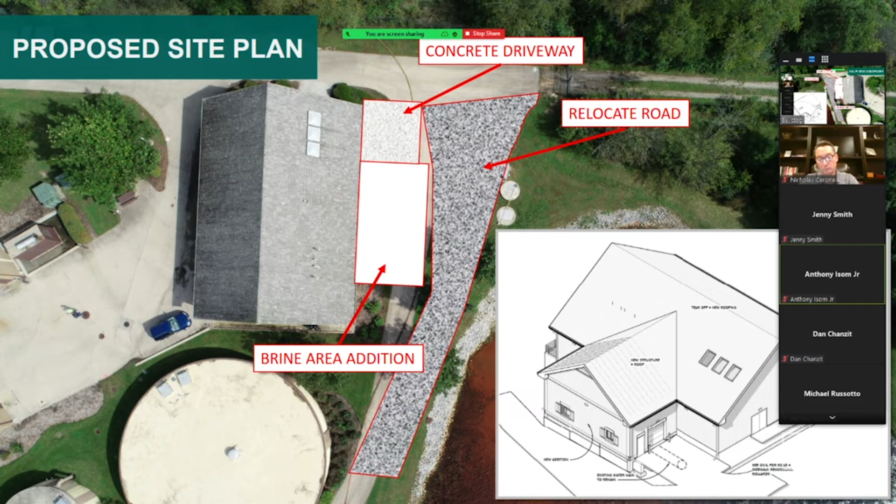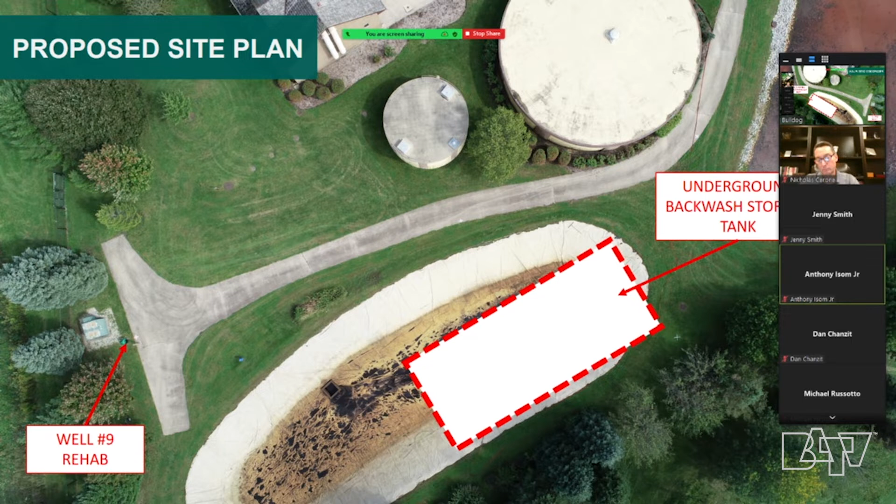So a brief reminder of the high-level items that are part of the water treatment plant expansion project or modifications project. There was a brine area addition occurring at water treatment plant number 2, to improve the process related to the chlorine feed system. You'll see some definite progress there, as well as the underground backwash storage tank that is replacing the existing backwash lagoon associated with water treatment plant number 1. If you look at this aerial, which is pre-construction, and the outline of where the backwash tank is to go, you'll see there's definitely been some advancement on that front as well.

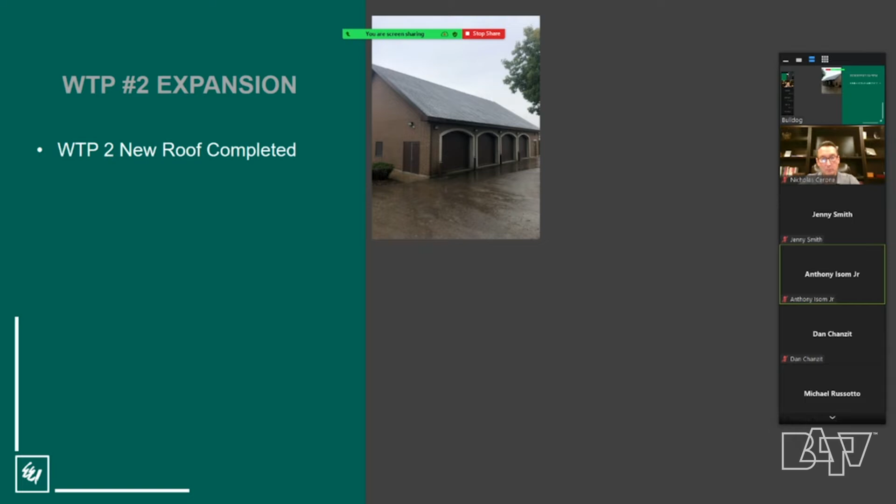So moving forward into what has happened since the last update, water treatment plant number 2 has received its new roof, so that building's roofing is done. Water treatment plant number 1 is also getting a new roof that has not been completed yet, I believe, right? Correct. See, this is why I bring Emily, so I can look over my shoulder and confirm when I'm running astray. The new brine building interior is moving along. They've done a lot of the coating systems. It's completely enclosed now from the elements, so they can continue to work through the winter here and get the internal items constructed and get the processes online. The anticipation is that this will be operational within the next 2 to 3 months.

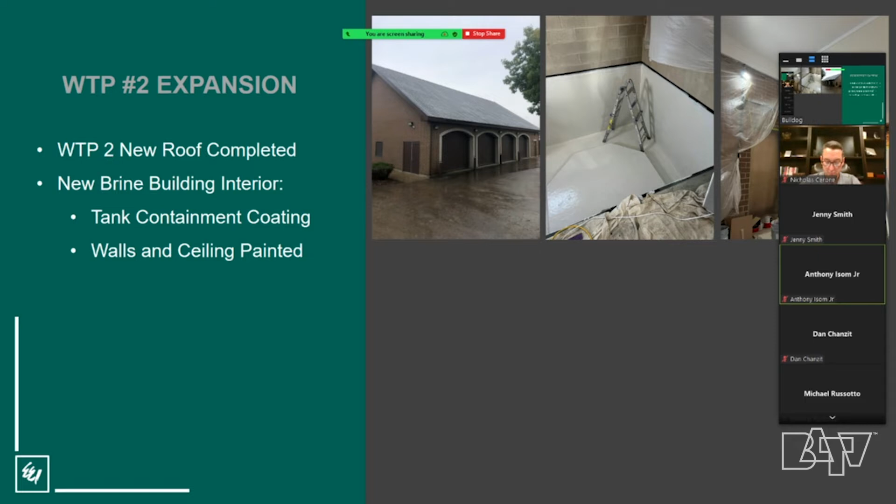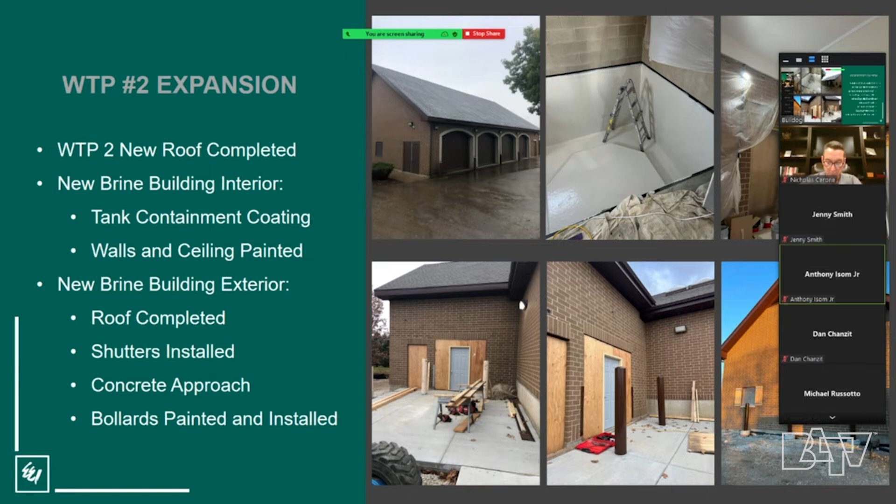The brine building exterior, you can see, is mostly complete, while they wait for the doors to come in and to be able to put those in place. They have temporary arrangements to keep the heat in while they're doing painting and other work inside that building.

The backwash storage tank has also seen quite a bit of work since our last update. With the last update, they had just poured the bottom slab. Well, they've also constructed the walls and the top slab, in addition to installing the hatches. In fact, this construction is essentially complete. There are some instrumentation items yet to be installed, but otherwise it is fully functional and has been functional for a handful of weeks now, and it seems to be operating very well.

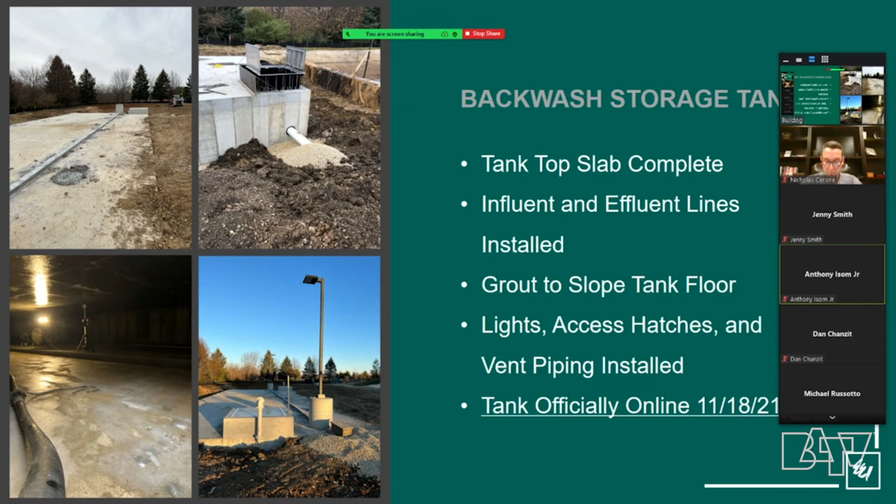Online November 18th, as noted there. Well 11 rehab is ongoing. The contractor has noted that the pumping assembly should be arriving hopefully within the next couple of weeks. Anticipated reinstallation of the equipment in January, with startup anticipated by the end of January. So they will then move on to the next well rehab, which is well number 10, and subsequently after that is completed, well number 9. So all 3 deep wells that go into water treatment plant number 1 are rehabbed as part of this project, as a reminder. This is still the first one under rehab.

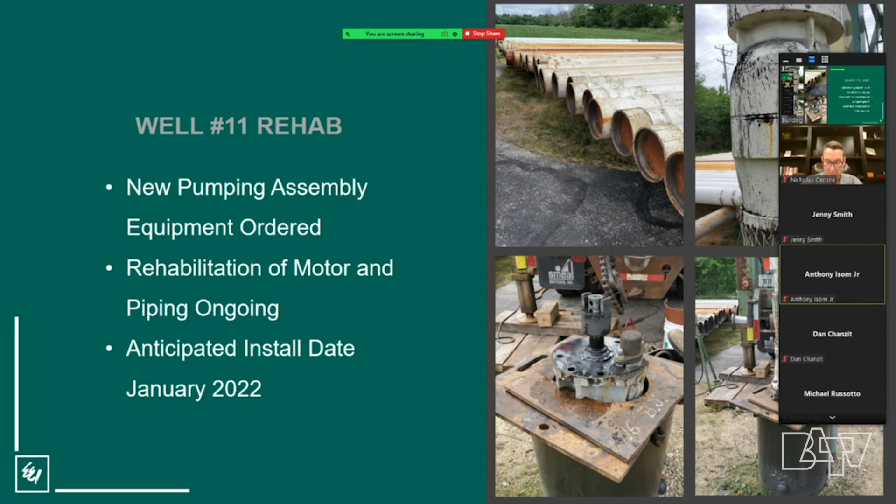Similarly, the high service pumps are still waiting for the equipment to arrive back on site, but that is expected within the next week. It's anticipated early in January at the latest that those first 2 pumps will be reinstalled, and then they will move on to the next set of pumps, and that will be duplicated one more time because there's a total of 6 pumps that are going to be rehabilitated as part of this project.

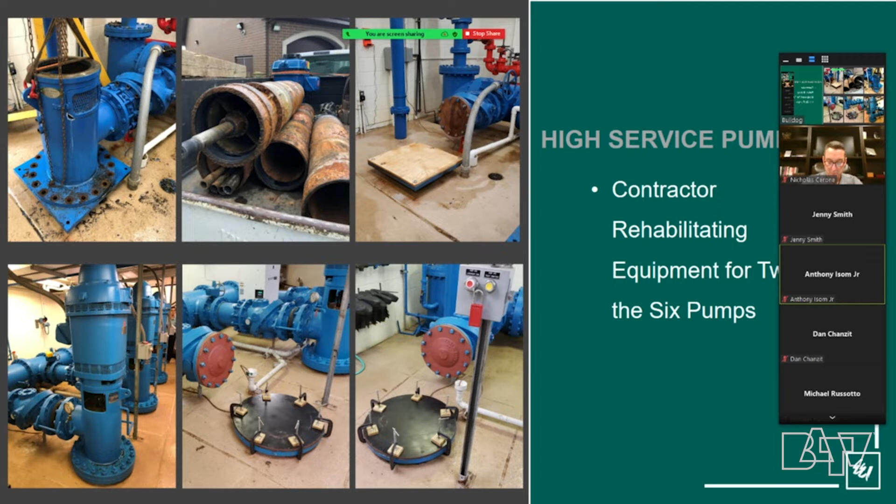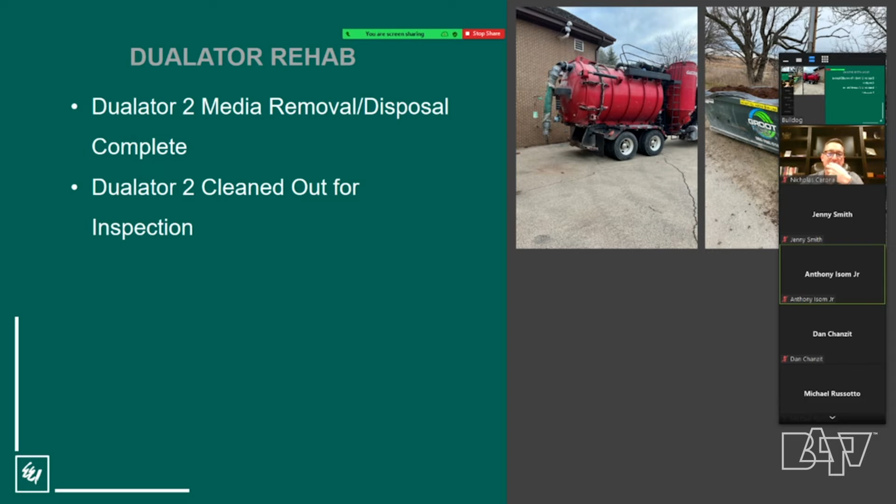So they have commenced with the removal and disposal of the media in one of the two dualators. They're keeping this facility online using the remaining dualator while they do the rehabilitation on this second one. That media has been removed from the dualator and it's been cleaned out for inspection. That inspection is ongoing, and we're currently determining the level of recoating that will have to occur within that dualator, which was expected as part of the bid process.

There's also been a very interesting component to this that city staff has really helped out with, and it's anticipated to provide great benefits as the project moves along. We are reusing some of the original filter media and reinstalling it along with new media, because there are properties with that existing media, accumulated over time, that will actually help remove ammonia in the raw water, which can otherwise interfere with the chlorination process. So the anticipation is that reseeding the new media with this existing media will help those properties proliferate within the new media and readily help remove the ammonia long term.

What does that mean? That means less chlorine has to be fed into the system, so it's lower chemical costs and a much more efficient process. So it's using the existing treatment process and reusing that, putting it back into the existing dualators when we put the new media in there.

The city staff has taken some of this media, they had existing tankage that we put it into, and they are watching over it and actually running water through it to give it the source it needs to continue the activation and treatment it can provide. So it's kind of an interesting side project that city staff has really helped facilitate moving forward, almost like a little science experiment. When this is all said and done, we're going to continue to monitor this and see how quickly we're able to regain the original treatment we expect. There's not much literature on this, so we're kind of blazing a new trail here, again with the help of city staff.

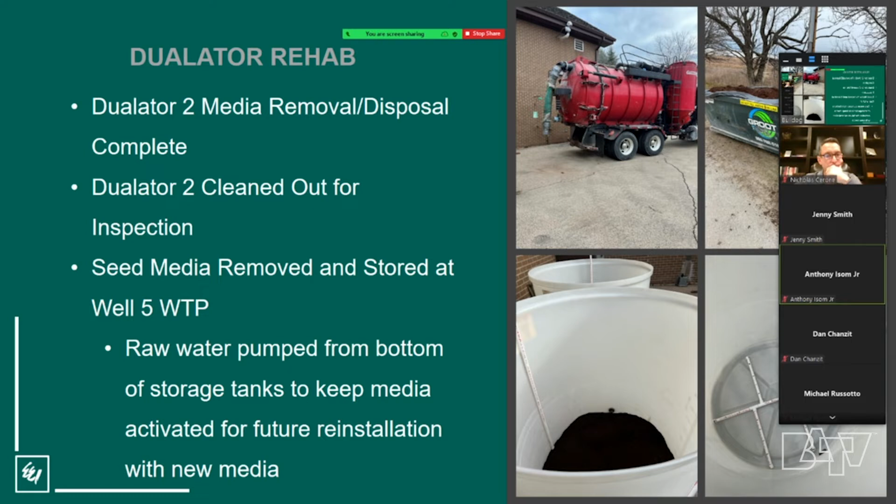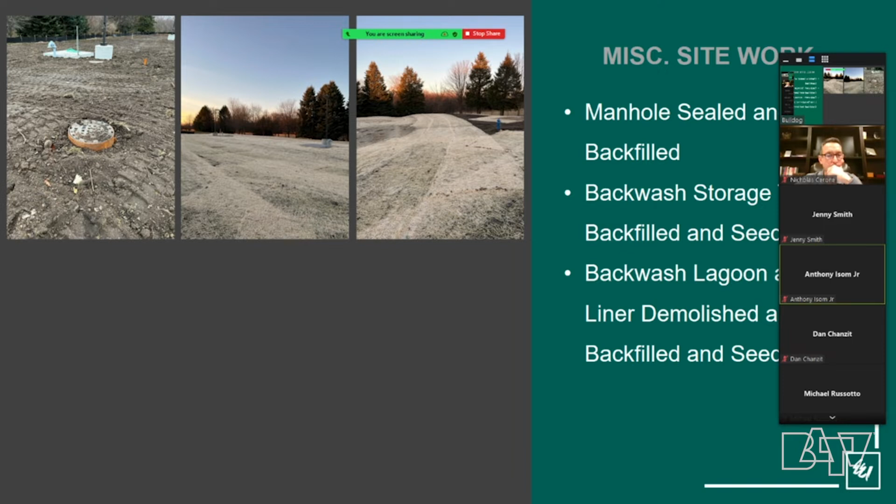Other miscellaneous site work: there's actually been quite a bit of restoration over the last couple of weeks. The contractors worked hard getting a lot of the rough and fine grading done in areas where they've completed work. They've laid down seeding and blankets to get through the winter here. It's anticipated additional restoration will occur when springtime comes, but the site where they have completed work is in pretty good shape at this point, including the new backwash tank, where they have done all of the grading and filled in.

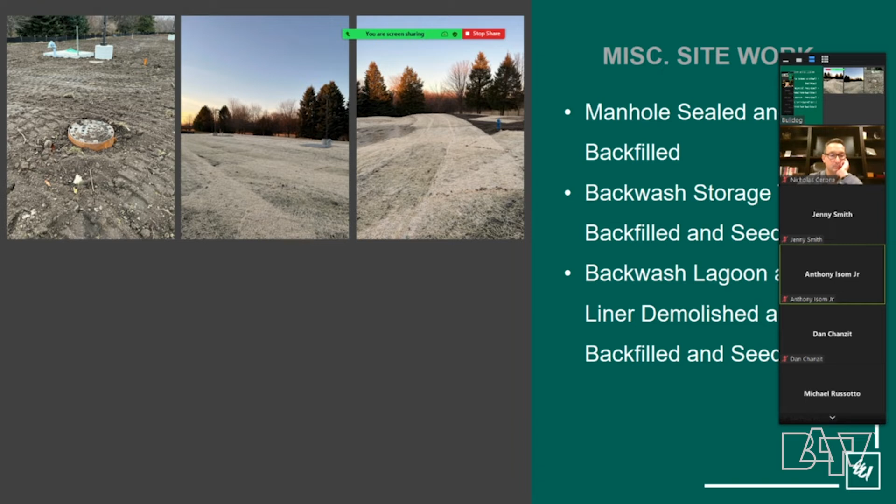So you can see some other photos here around the buildings. It's starting to look like the finished product from a site perspective.

Next steps: need to finalize the backwash storage tank with the instrumentation, but otherwise it is fully functional. Set the brine storage tanks - that's the next big step in the brine building addition, to be able to utilize those for the chlorination process, and then demolish the existing brine storage tanks and install new chemical feed pumps.

Ongoing brine building modifications, getting that building ready to go so it's fully functional for operations. Continue the rehab for dualator number 2. We anticipate that's going to be going on for another month or two, at which time they will switch over to the other dualator, and the plan is to have both dualators complete by springtime when the water demand picks back up again, and both dualators will be needed to meet the demands of the system.

And then the ongoing well 11 and high service pump equipment install. Anticipation is within the next month, well 11's equipment will be reinstalled, as well as 2 of the high service pumps, and we'll be moving on to the next set of modifications there.

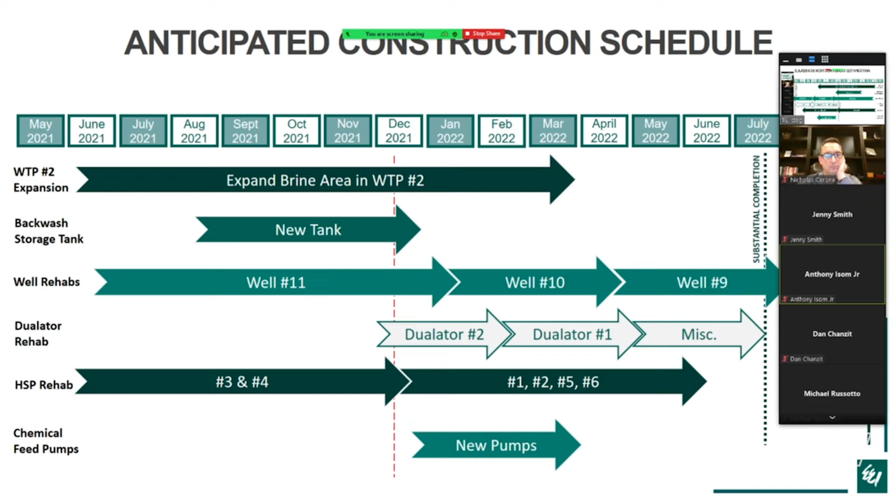Dualator rehabs: dualator number 2 into February, and then dualator number 1 anticipated into April. High service pump rehabs are going to be going on at least into midsummer, and then the chemical feed pumps installation should begin within the next month or two, as soon as the existing brine tanks can be removed.

With that, I will take any questions or comments that anybody has. Does anybody have any questions or comments?

I have one. Do we think we're going to be on schedule? Are we having any issues with parts availability, deliveries on any of the hard parts, the pumps, the plumbing, any of that stuff? So the only concern I currently have is with the well rehabilitations.

That well 11, being the first of the 3 well rehabs, getting the new pumping assembly has taken quite a long time. So that's, of course, pushing the other 2 well rehab schedules. If everything goes well, we might be able to get those rehabilitations done by the substantial completion date. I anticipate we're probably going to be completing that work sometime between substantial completion and final completion, as it currently stands.

There's also the matter of making sure that the supply is adequate, because taking a well offline in the summer is not ideal. So we're going to have to be mindful of that as we move into the summer months here.

And that was going to be one of my questions. Do we want to make sure that we have all the parts they think they'll need to rehabilitate those wells before they pull the wells, so that way we don't get stuck with a well that's down for 6 months waiting for parts? It's certainly a consideration with wells.